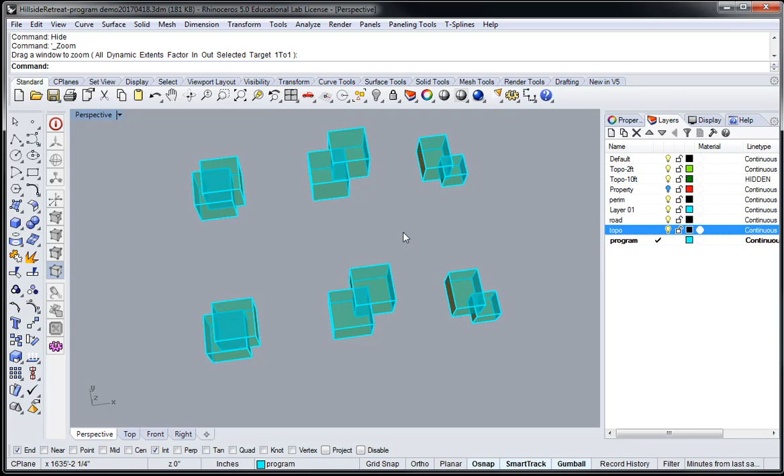We are going to attempt to hollow, let's say, the living room, kitchen, and dining room combination first. For this, I guess we don't need all this stuff. We could just kind of hide them, so let's just hide them.

So I'm just left with these pieces, and we're going to do a few different ways of making these hollows.

On our first subtraction cube, all we really did was take this thing, let's ungroup them. If we recall, we exploded them first and took the bottom off.

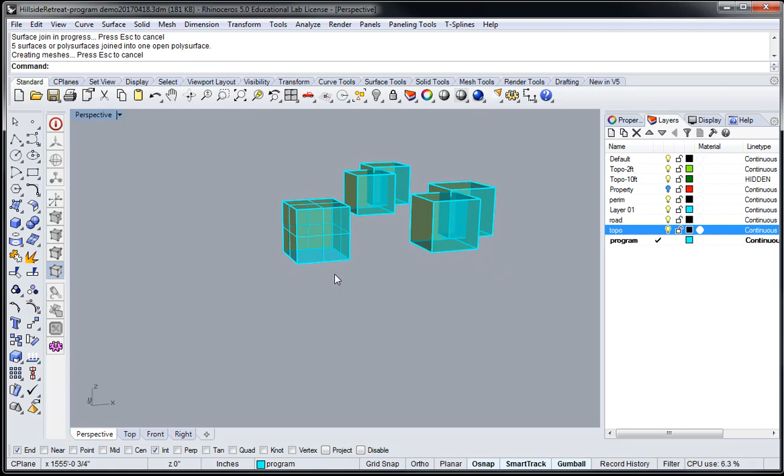And then we joined them again, and made a hollow, made the wall thickness from that by going to offset surface.

So taking this guy and then saying distance 9, sharp, solid yes, tolerance, and flip all. That's how we made our walls, if you recall. Remember, if you did not join these first, you're going to have some editing to do, so just remember to join these first if you are going to do it this way.

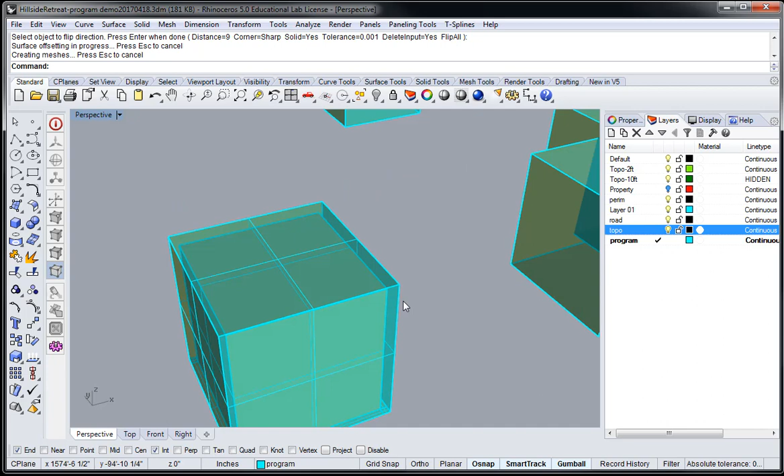But this time we're going to use this cube as is and then try to hollow this out without taking the bottom off.

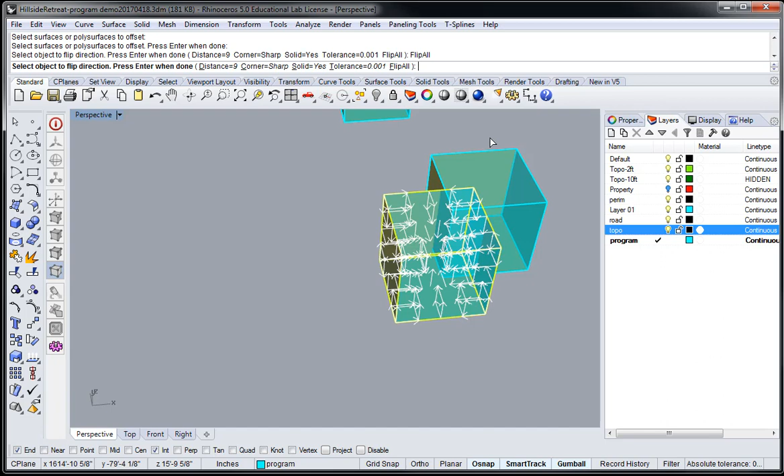So again, if we try to offset the surface on these guys, let's say offset surface, select this, enter when done, flip all. We're still going to keep the 9-inch wall, and there is one area. We're going to do the same thing with this guy too, flip all, and there it is.

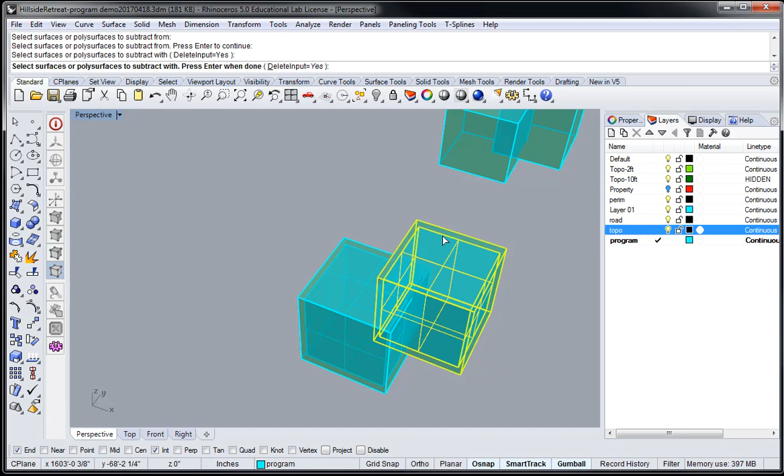So if we take this thing and just say, I'm going to Boolean this out. Boolean difference, take this and Boolean out this thing. There it is. So we assume that this is hollowed out.

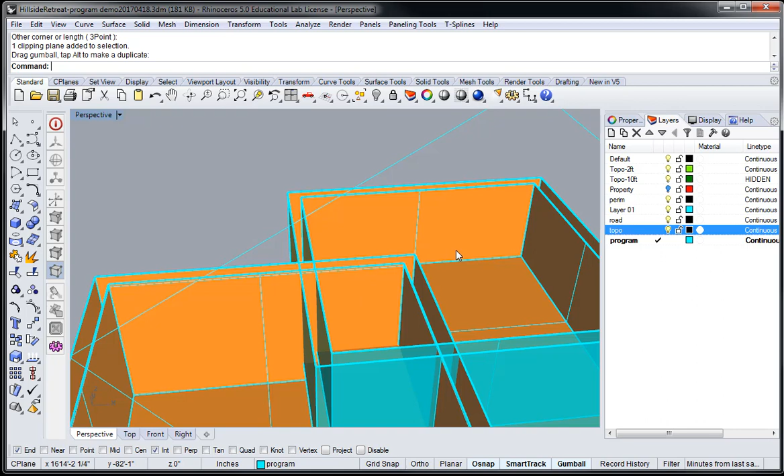If we check the clipping plane, you will note that although this looks hollow on the inside, it is still one solid form inside another solid form. It never really took it out because, well, Rhino doesn't work that way.

So even though we said to Boolean difference, it didn't really do anything. In order for this to hollow out, we need to basically have the inside touch the outside air, if that makes sense. So let's do this.

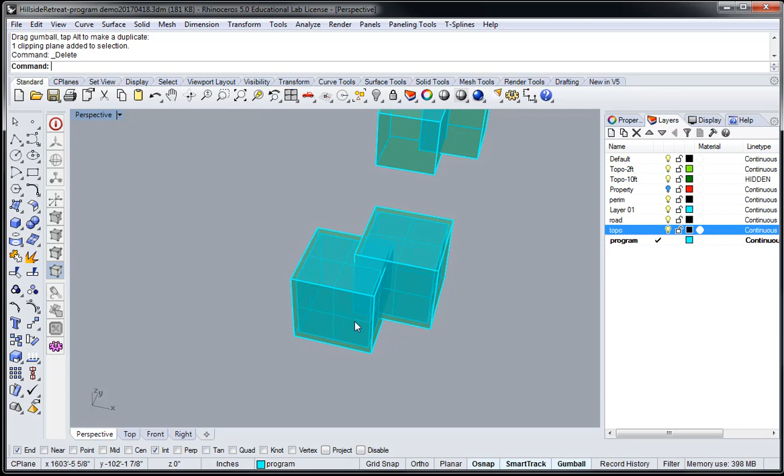I'm going to make another safety copy of this so that we'll explore a couple different ways to do this thing.

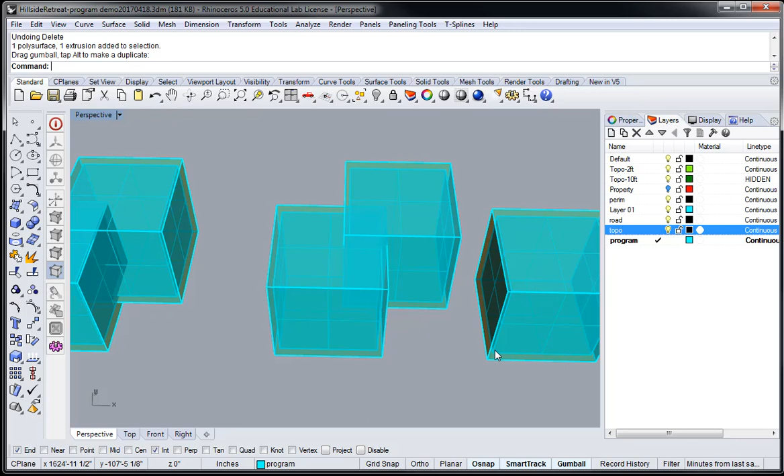Now I'm going to take this guy out right here, actually let's undo that. Let's demonstrate with this one single piece. If I take this thing and just Boolean difference this thing out, it really didn't hollow it.

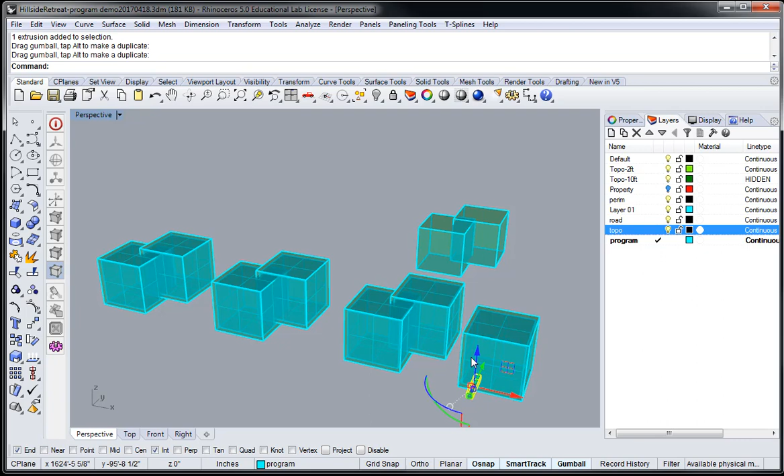However, if I make another volume and bring this in basically anywhere, half in, half out, outside, you could tell that it is penetrated inside the box, right?

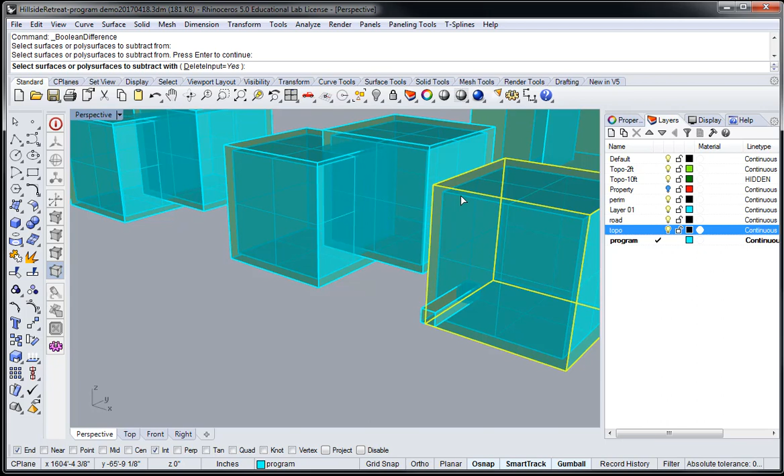So now if I go ahead and Boolean difference this outer form with this and this, enter, now I could see inside. Notice that...

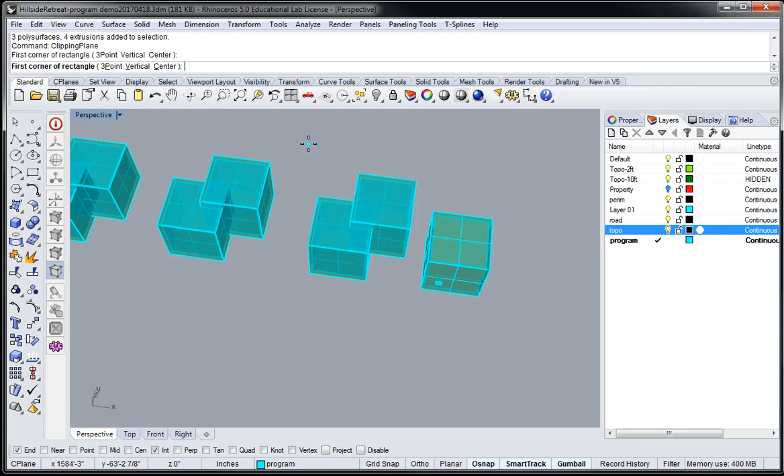If I do a clipping plane now of these guys, notice the difference between the two. This inside is orange because on the display I set the back face color as orange. I don't know what color you set, but mine is orange. So the outside surface is this teal-like color, and the inside surface is orange. This box inside here, the outside surface is teal and the inside surface is orange, which means I have a solid box inside a solid box.

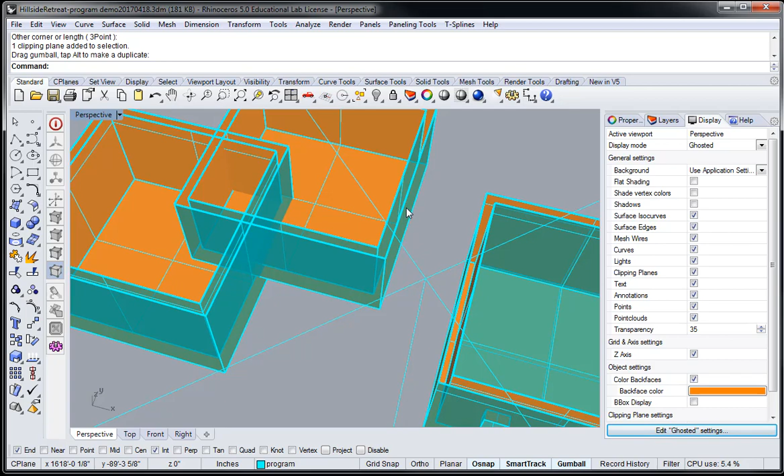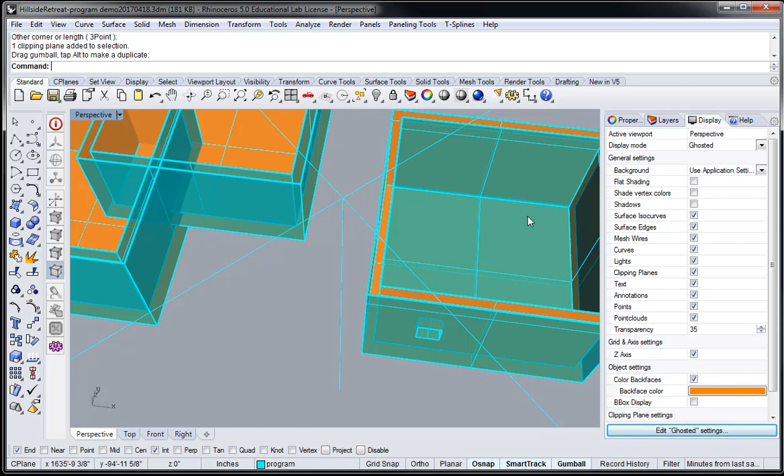But if we look at this side, you notice that the teal color is on the outside and the orange color is on the inside. For this surface, the teal color is on the inside and the orange color is on the outside. That is because now it is a hollow room. The only way it made the hollow room is because I subtracted this stick out of the whole thing.

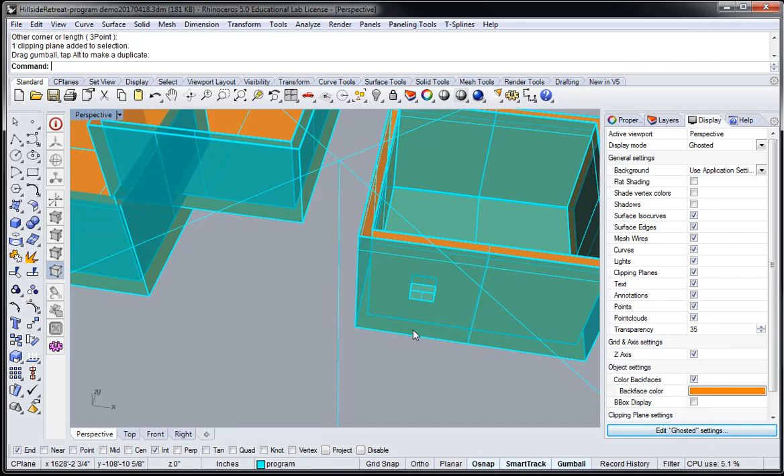This stick, this other volume that I penetrated in and subtracted at the same time, allows the outside air to basically come into the inside space, right? If you could imagine that I kind of sucked this inside space out along with the stick, that's what created the inside hollow.

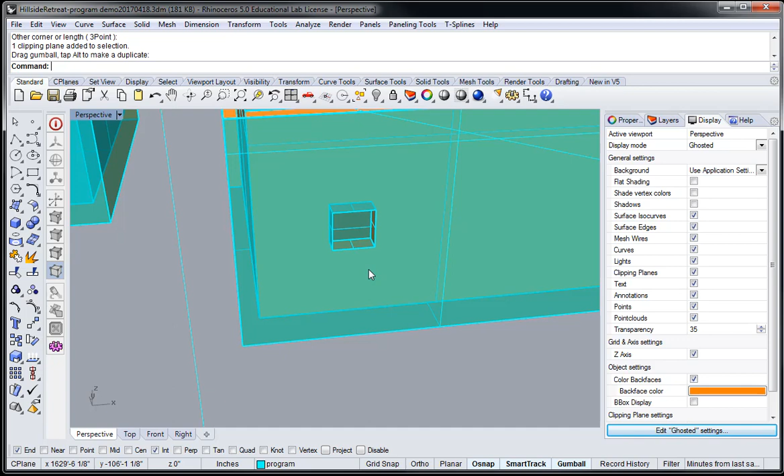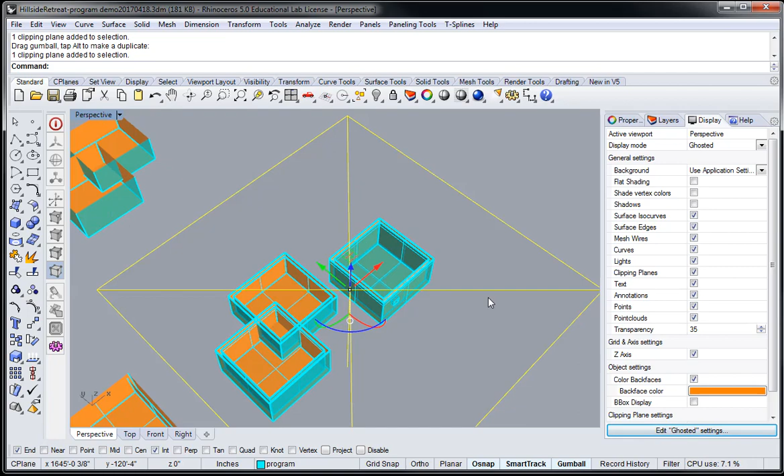So again, as long as the outside air or outside surface comes into this other volume that we made and touches the inside surface, so this space is now contiguous with the outside surface or outside air, that's what creates the hollow space and not a solid inside a solid. So this thing right here, we're going to do pretty much the same thing.

This time what we're going to do is take this object and forget about this inside surface for now, and use this as the break to the outside world on this inside surface. So we'll do a Boolean difference of this piece, enter, with that and that as a subtraction piece.

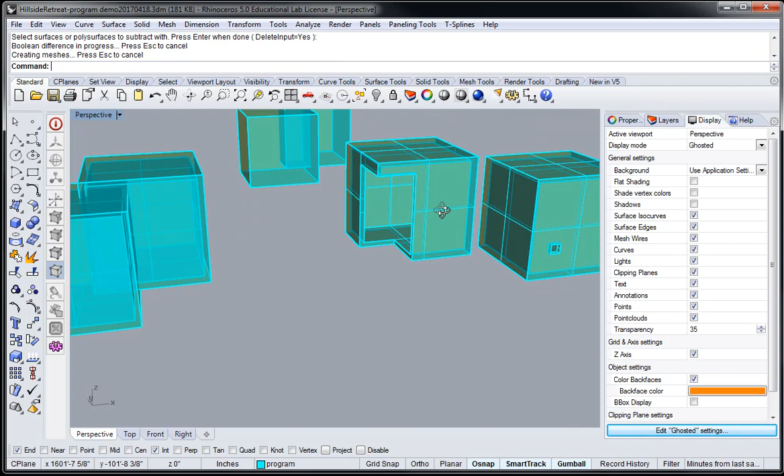So now we have a continuous big window, just like this one. It's a small window; this is a big window right here.

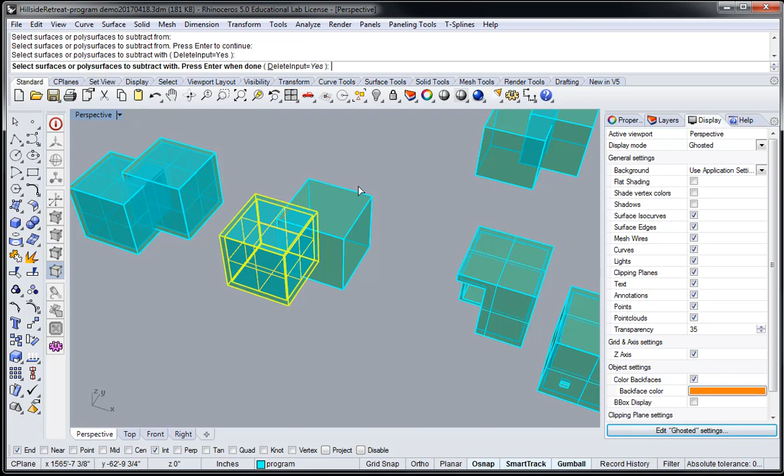So we're going to do the opposite with this one. I don't need this one right here, so I'm going to take this inside solid out with this box right here. So if I go to Boolean difference, that box with this and this, enter, now I have made an opening to the outside world.

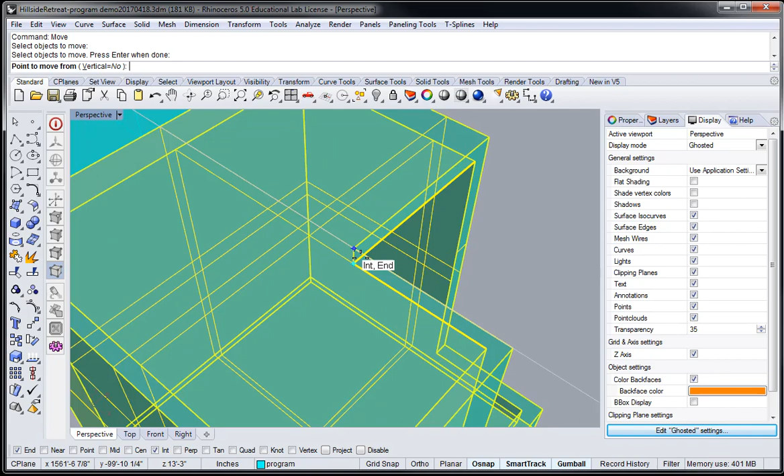So now I can take this thing and go from this point to another known point, which is this corner right here. I'm going to move this thing, select that—be careful where you choose because there's lots of different points right here—and select the outside corner there, and move it to this corner right over here.

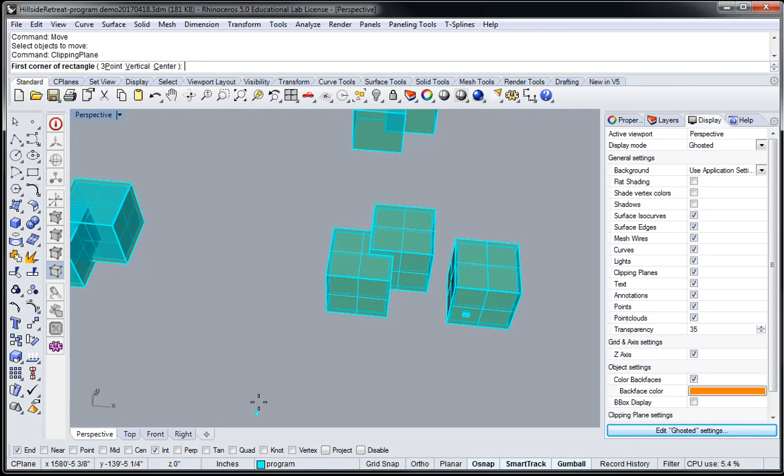And there I have now a closed, or a hollow space. We'll prove that by showing the clipping plane, and we'll set this up a little bit. So now I have these two spaces that are continuous on the inside.